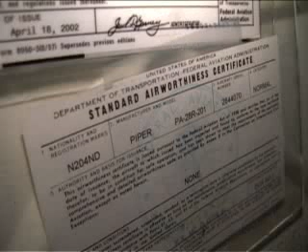Next, make sure that the documents required under 91.9 are located in the aircraft. The registration certificate and the airworthiness certificate are located behind the aft bulkhead. The airworthiness certificate must be apparent in the aircraft, so make sure you find the proper aircraft registration number. UND is now placing other required documents for flight inside these little bags.

I'd like to open up the bag and make sure that the registration number of the aircraft corresponds with the aircraft you're flying. Check the front page of the Pilot's Operating Handbook to make sure you see the proper registration number there. Also open the book to Section 6 and check that the weight and balance data corresponds with what you've computed using AIMS, if you use AIMS for your weight and balance information.

Also inside this bag is the minimum equipment list. As you open it up, make sure you find the letter of authorization right away inside. Also, in the back you'll find the supplements for the operation of the GPS units located inside this book as well.

The next item on the checklist is to check the Hobbs meter and tachometer. Get the dispatch book and check what you see on the tach and Hobbs versus what the dispatch book actually says. As I open the dispatch book, check the MEL placards or deferment placards in certain aircraft to make sure you see appropriate MEL'd items.

If you do have something MEL'd, grab the minimum equipment list binder and check that it was properly done. Next, we have the maintenance sheet, which tells us when inspections are due. Make sure you fall before the date listed as the do-not-overfly date, and check the tachometer versus what the maintenance Hobbs says.

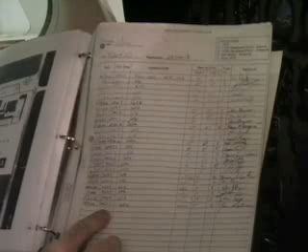Also in the discrepancy pages, make sure all open discrepancies have been closed out. Check the bottom to see that the corrective actions show the discrepancy has been closed out and signed by a maintenance official. Other commonly forgotten items in the dispatch book include checking that the FCC certificate is in place if you're going on an international flight - you'll find it in the very back. Also, if you're going on an IFR flight, remember the VOR must be inspected within the previous 30 days. Looks like this one was done on 10/12 and has just a little over a week left.

Next on the checklist is to release the control wheel and check that the flight controls are free and correct. As you move the control wheel to the left, make sure the left aileron moves up and the right aileron moves down. Check the opposite control: right aileron up, left aileron down. Pull the control wheel back, the stabilator goes up; push forward, the stabilator goes back down.

After that, we're going to check the static and pitot drains. Reach your hand down next to your seat, give them a push, and check for any water. These link right to the pitot-static mast. There are lines that feed up from the pitot-static mast towards the pitot-static instruments, and you can find if any moisture has gathered in this system through these vents.

Next thing is to cycle the fuel selector. We know that this engine ran on the right tank since it's on the right tank position. Move it to the left side, then move the position towards the off selection as well, then back over towards right again, just to make sure that it has full freedom of motion. So check that fuel selector.

Next thing we want to check is the alternate static source. On most Piper aircraft, it's located right underneath the panel on the pilot's side. If the alternate static source is parallel with the panel, it's in the normal position. You want to make sure that it's in that position. If it's armed, it will be perpendicular to the panel. So our alternate static source is in the normal position.

Next, we move up towards the magneto switch, make sure the key's removed and it's in the off position. After which, we'll move up towards the clock. Check that the second hand is sweeping and the local time is set. You can push in the small knob and twist it to change the time on the clock if necessary.

The next thing is to check the flight and nav instruments. Under 91.9, they list required markings and placards for flight. Markings include the numbers on the airspeed indicator, HSI, altimeter, and vertical speed indicator. If these things aren't visible, then this aircraft isn't legal to fly. Make sure you don't see any cracked glass. Check your attitude indicator, make sure it didn't tumble or flip over. Also check the condition of all the markings on these instruments.

The next item on our pre-flight inspection is to check the compass. You like to run your hand along the compass to make sure that there's no denatured kerosene leaking out. The reason they put that fluid in there is the fact that it won't freeze. Also check to make sure that the compass card is present. Again, this would be required as a marking under 91.9 on your aircraft.

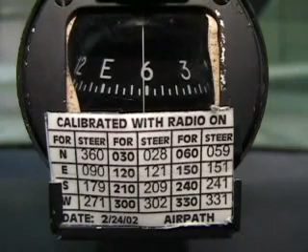Next, we have the emergency locator transmitter. We check over and make sure that the switch is in the armed position.

After the ELT, we'll move down to check that the heater and defroster are in the off position, and the circuit breakers are in. Notice on the Arrow there are only a couple of circuit breakers on most models that you can pop. The landing gear and the battery feeder breaker are the only two that can really be physically popped on most Piper Arrows. Afterwards, we check that our alternate air source is closed.

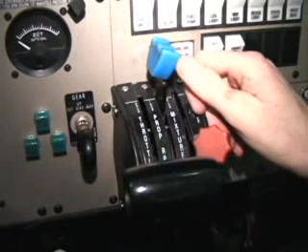The mixture is in the idle cutoff position, propeller controls full forward, and the throttle is closed. After which we want to cycle the flaps, making sure that the flaps will easily move through all of the positions. Afterwards, I like to leave the flaps in the fully extended position in order to continue with my exterior pre-flight.

We move down to the emergency gear extension lever, make sure it's in the up position. If it's in the down position, your gear will never be able to retract.

After checking the emergency gear lever, we move over to the fire extinguisher. We want to make sure that the extinguisher is properly secured, so check that it's latched. Also, when you're looking at the fire extinguisher, make sure that the pin is in place and you feel that there's some mass to it, so that it's not been discharged. These dual halon fire extinguishers, after being discharged, will discharge their entire charge in 8 to 10 seconds, it'll all be gone. So if you pop this thing, it will have nothing left. So you want to check that every once in a while.

After checking the fire extinguisher, we make sure that the gear handle is in the down position, and the day-night switch is set as required. Make sure you're in the day position for day flight, otherwise your annunciators won't show up properly.

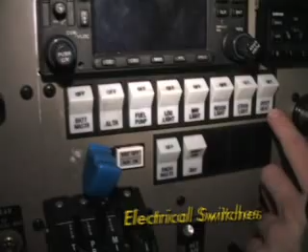Electrical switches, we make sure all are off. After the electrical switches, we flick on the battery master and check that we get 3 green lights that show up. If your nav lights are on, you'll notice that they'll be completely dim in the daytime.

Next thing we check is that the annunciator lights come illuminated. Vacuum, alternator, and oil annunciators should be located above.

After checking the annunciator lights, we make sure that we have the switch and panel lights positioned as appropriate. Since I'd be going on a day flight, I want to make sure that my switch and panel lights are off.

Check the fuel gauges to make sure that you have adequate fuel quantity. Remember that the Arrows at UND Aerospace aren't topped off between all flights. You'll find that they'll be filled to tabs, giving you 50 gallons, or 25 a side.

Check the engine instruments prior to your flight too. If you notice, all of our engine instruments have a little white dot next to them. The little white dot is where the needle should fall during the off position. With the battery master off, all of the instruments will fall towards that position. Make sure with the battery master on that all of the needles fall off of the small white dot.

Next, we want to turn on all of our aircraft lights and make a run around the aircraft to check that all lights properly illuminate.

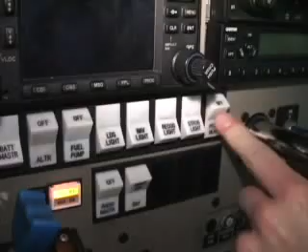Also, you want to turn on the pitot heat. The pitot heat can be on for a total of 3 minutes on the ground. You want to make sure that the pitot mast is properly heated prior to any flight. The stall warning vane is also checked at this time, and afterwards, we turn all of our electrical switches off.

To begin with the exterior pre-flight, we're looking over the windows and fuselage on the Piper Arrow. First thing you'd want to make sure is that all of our windows do not have any extremely large scratches, and that the aircraft looks like it wasn't hit by a fuel truck.

The next item on the checklist is to check the flap. We'll notice that the flap on the Piper Arrow only locks into position while fully up. It tells you not to use it as a step when down, because you'd obviously fall. We have the actuating arm in the lower left-hand corner, and we'd like to make sure that we check the actuator arm for freedom of motion.

Underneath the flap, you'll notice a bonding strap. The bonding strap is used to discharge static electricity to the frame of the aircraft, similar to the static wick. The flap also has one static wick.

The next item on the Piper Arrow pre-flight is to check the aileron. We want to check the aileron for freedom of motion. If you locate the hinge on the central portion of the aileron, you'll find an actuator arm similar to that on the flap. Check for freedom of motion.

Also, the aileron has two static wicks and will move in a fashion more up than it does down, due to the fact that these are equipped with differential throw ailerons.

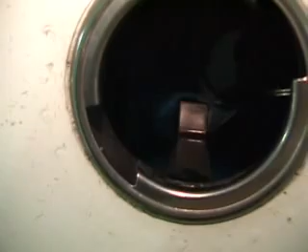The next item to check on our aircraft is the fuel cap and fuel quantity. First, we'll remove our fuel cap. You'll notice there's a black rubber gasket that should be located around this fuel cap. Also, Piper Arrows are filled only to tabs at UND Aerospace. This leaves 50 usable gallons of fuel in our aircraft.

After checking our fuel quantity, we're going to want to inspect our fuel for contaminations and to make sure we have the proper type of fuel. Simply insert the fuel sump into our fuel sump on our aircraft. Notice that the fuel is blue in color. Any water or contamination would float to the bottom of the cup. We'd notice that if there was 100 octane fuel mixed in with our blue 100 low lead, the fuel would turn clear in color. 100 is typically green, 80 octane fuel is red in color.

After inspecting the fuel, we want to check out the right main landing gear on our Piper Arrow. The first thing we notice is that our tire is properly inflated. I also like to give the tire a good roll to check and make sure that the tread underneath is not worn, as well as the tread on top that is exposed.

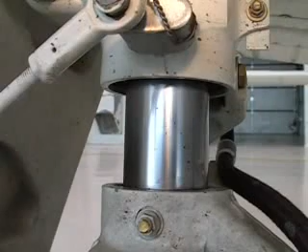Also, according to Section 8 of your airplane flight manual, 2 inches plus or minus 0.25 of required strut inflation is required on our main landing gear oleo strut. About 3 finger spaces will tell you that you have the 2 inches.

The next item that's visible is your brake caliper. You want to make sure that red fluid is not leaking out of our caliper, as well as that the 2 pucks inside of our caliper have ample meat still on our brake pads. This works similar to any brake pad system in your car. Mil-Spec 5606 is the red fluid used in this system.

The next item we'd like to check would be the gear door. Make sure the gear door is properly attached to the aircraft. It actuates automatically as the landing gear is retracted.

Next, we'll notice we have our down lock switch. You want to make sure that the down lock switch is making contact with the down lock hook, and is not bent in any fashion as well.

Another micro switch you can check for is your up limit switch. If you reach up into the wheel well, you'll find the up limit switch. You want to make sure this switch as well is not bent. This is what turns off the red gear warning unsafe light after the gear has been fully retracted.

Also, you'll notice we can see an actuating cylinder up inside of the wheel well as well. Again, you want to make sure there is no red hydraulic fluid, the Mil-Spec 5606, leaking from this system.

After inspecting the right main landing gear, we want to check that the fresh air inlet is free from any obstructions.

After inspecting the fresh air inlet, we want to check the windshield and outside air temperature probe. The windshield can easily get covered with bugs in the summertime. If you find that it's hard to see out of your windshield, give line service a call on 123.3 and they'll gladly come and clean it off.

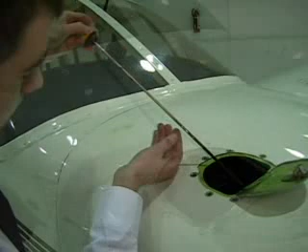If it's the winter, be sure to remove the engine cover before attempting to check the oil quantity. Remove the oil dipstick, and first, make sure and check that the black rubber gasket is in place on the top of the dipstick. This prevents moisture from entering the oil system and also prevents oil from leaking out during engine operation. We'll check our oil quantity to make sure that it falls between 6 and 8 quarts of oil.

The pilot's operating handbook refers to a minimum quantity of 2, but according to UND Aerospace, we cannot operate our aircraft with less than 6 quarts of oil. Looks like our airplane has about 8.

Next item on our checklist is to inspect the cowling latches after taking a look at the oil quantity. Make sure that our cowling latches are secured, and next we move down to check the oil cooler inlet.

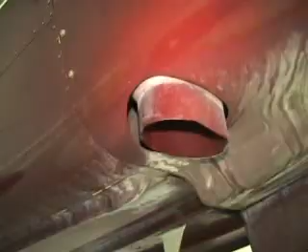This inlet right here is not the ram air intake similar to that on the Piper Warrior. It actually leads down to the oil cooler. Here's the exit point for the oil cooler. If you reach your hand inside, you can actually feel the small radiator-like device inside of the aircraft.

Up on top of the cowling as well is a strong point on the cowling to prevent any dents from occurring as the door swung open. You'll notice that the point can take a good deal of force.

After inspecting our oil cooler inlet and cowling latches, we want to take a look at our exhaust stack on the Arrow. Pretty much make sure that the exhaust stack is in place. If the aircraft's cool, you can give it a wiggle to make sure that it's not falling off, but be cautious of a hot aircraft. These can be quite hot.

After inspecting the exhaust, we want to make sure that our nose gear is safe as well. We're looking for 2.75 inches of inflation on our nose wheel oleo strut. Again, similar to the main landing gear, these are filled with nitrogen gas.

The service point is located inside of the cowling. Also, there would be a red mil-spec 5606 fluid that could be spilling out of this oleo strut as well. If it were damaged, you'd notice there'd be metal on metal contact and possibly a puddle of red fluid on the ground.

Notice on the left-hand side of this nose wheel, we do have a shimmy dampener. The purpose of this fluid-filled shimmy dampener is to dampen any shimmying motion as you get to high speeds with the nose wheel running down the runway. Due to the fact that it is a steerable nose wheel, it's not in a fixed position. Therefore, this device is necessary.

Just check that it is attached firmly to the aircraft as well. Also, we have an extension assist spring that must be intact as well on the nose wheel.

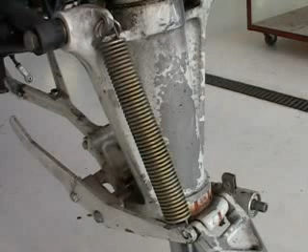We can check our nose landing gear doors that they're attached properly and move towards the back where our micro switches are located. Up underneath, you'll notice the up limit switch and down lock switch.

You'd like to make sure that the down lock switch is making contact with the down lock hook and therefore properly working. Similar to those on the main landing gear, you do want to make sure that none of these switches are bent. Also, we would like to check the actuating cylinder for any leaking of hydraulic fluid.

After inspecting the Piper Arrow nose wheel, we want to inspect the landing light on our aircraft. Notice there is a bezel located around this landing light that should be properly in place. Typically, this is a common error on this aircraft. You do want to make sure that this is fastened.

Afterwards, we'd like to check the air intakes on this aircraft. The intake right below the landing light is for the environmental system. It supplies air that flows around a shroud around the exhaust to bring heated air into the cabin, also for the window defrost.

After inspecting the air intakes on the aircraft, we should inspect the alternator belt. The alternator belt is this black belt that has a pulley located around the crankshaft. Check for tension on the alternator belt.

Next item to be inspected is the aircraft propeller. The main point of the propeller where most damage will occur is the face of the propeller. The face refers to the portion of the propeller that actually faces the pilot that you could see while you're flying the aircraft. You want to run your hand up and down the propeller, checking for any dings or nicks that would occur due to normal damage in flight.

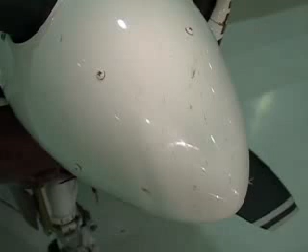A next item to inspect on the aircraft would be the spinner of the propeller. The spinner can easily be damaged by rocks during a run-up or while conducting soft field operations. Run your hand across the spinner and make sure that all screws are properly fastened.

The purpose of the spinner is to provide cooling air into the cowling. Notice the aerodynamic shape leads airflow right into the cowling and also reduces drag. Inside this propeller dome is a large actuating piston which causes the blades to change their pitch.

When inspecting the air intakes, you'll notice a small hole located near cylinder number 2 on the left-hand side of the cowling. This small hole allows cooling air to enter towards the lower portions of cylinders 2 and 4. There isn't a similar hole on the side with cylinders 1 and 3 because baffling, or rubber strips, leads air down towards the lower portion of the cowling to cool those cylinders instead.

On the sides of cylinders 2 and 4, internally, is the main air intake, located on the rear of cylinder number 4. This is the reason there really isn't a problem with induction icing on the Piper Arrow, and an alternate air source is only needed if the air filter gets clogged with debris.

Moving on from inspecting the front portion of the aircraft, remember to check that on the left-hand side of your cowling, the cowling latches are secured.

Afterwards, you'll roll underneath the cowling and inspect the oil breather, which has an orange cover and is a metal tube. Its purpose is to release water vapor from the oil. If the oil breather is clogged with ice or debris, once the oil reaches 180 degrees Fahrenheit, noted on the oil temperature gauge by a white line, the oil will release all water vapor due to its hygroscopic nature.

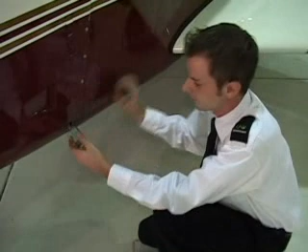There is another fuel strainer located on the left-hand side of this cowling. Similar to checking the one under the main fuel tanks, you remove fuel and check for any sediment or debris, as well as water, checking for the proper color as before.

After pre-flighting the rest of the cowling, the rest of the pre-flight on the left wing is similar to that of the right wing, except for two additional items to inspect.

You'll notice we have the stall warning vane located on the left-hand side of the wing as well. You want to check for freedom of motion of this stall warning vane. As the stagnation point shifts rearward on the wing while approaching the critical angle of attack, airflow will reverse and push up on the tab to initiate the stall warning.

When inspecting the pitot mast, check that the front ram air inlet is free of any debris or bugs. There's a drain hole on the bottom portion of the pitot tube. On any Piper schematic, you'll notice this drain hole is actually only attached to the static port side of the pitot mast. The true drain for the pitot tube is located inside the cockpit, at the pitot static drains on the lower left-hand portion.

After inspecting the left wing, we want to check our lower surface antenna. One thing you're checking for is to make sure they don't have a thick coating of oil on them, since you can have erratic signals if the antennas are covered with oil.

With our two types of aircraft here, certain ones have Bendix GPS and certain have Garmin GPS, so there are two acronyms to remember. This aircraft, 384, is equipped with Garmin GPS, so we're looking for TCAM: Transponder in front, GPS, communications, ADF, and marker beacon antenna. On Bendix equipped aircraft, we'd have TDAM: transponder, DME, automatic direction finder, then marker beacon.

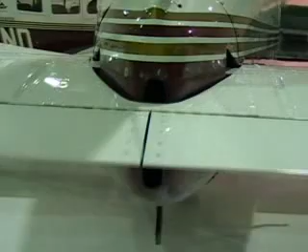While checking the stabilator, the anti-servo tab should also be checked as well. Check that the tab moves in the same direction as the stabilator with greater travel. The purpose of the anti-servo tab is to prevent over-controlling the aircraft and to give positive control feel.

Afterwards, you'd like to check that the tail tie-down has been removed as well. This tail tie-down has a threefold purpose. One of the purposes obviously is to tie down the aircraft.

Another is as a skid if you come in too tail low on a landing. The third is, while in maintenance, the aircraft will have a weight placed on the tail tie-down to stop it from tilting nose forward while on jacks.

The next item to inspect on our aircraft is the rudder. You want to make sure that the rudder has a slight freedom of motion, yet still feels attached. There is one static wick located on our rudder.

Up in the upper portion of the rudder of the aircraft, there is a counterweight as well. You can notice if you take your checklist and tap upwards, you'll hear it become hard surface towards the tip of the rudder located towards the front of the fuselage. This counterweight stops flutter, similar to those located on the ailerons.

After inspecting our rudder, we're to inspect the right side of the stabilator. The inspection process is exactly the same as that which we used on the left-hand side.

After inspecting the right side of the stabilator, you want to check the ELT antenna. The ELT antenna is this black antenna located on the upper portion of the right-hand side of the fuselage. Make sure it's securely fastened.

Also, the ELT battery is located behind this small ELT door. They use plastic fasteners on this for ease of removal in case you do need to arm the ELT manually if the switch up in the cockpit is not working.

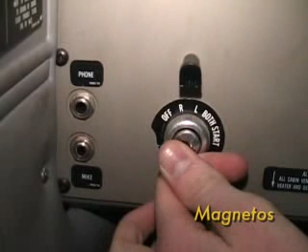The first item on the post-flight inspection is to verify that the magnetos are off. Be sure to turn the key to the off position and remove it. You want to make sure that the magnetos are properly grounded in order to protect anyone who moves the propeller accidentally on the ground.

The next item on the Arrow post-flight inspection is to make sure that the flight controls are properly secured. Take the seatbelt and place it around the control column and attach it. This will prevent the flight controls from flapping around in the wind.

The next item on our checklist is to check for oil leaks on the exterior of the aircraft. You want to take a look underneath the engine and make sure you don't see any puddling of oil.

The next item on our post-flight checklist is to check the aircraft exterior. You want to check the exterior of the aircraft, making sure that there's no dents or dings in the aircraft after your flight.

The next item on the Piper Arrow post-flight inspection is to check the tires and struts for proper inflation, and also to check the tires to see if there's excessive wear. You'll know if a strut's popped because there'll be red fluid leaking from the strut, that MIL H5606 that we talked about in the gear system, and also the strut will be bottomed out. There'd be no metal showing.

If you want to check the tire properly, give it a roll, and you can see if there's any flat spots underneath the aircraft. Also check for excessive wear. Maintenance won't replace a tire until cord actually shows through. It'll look like cloth coming through the tire, but excessive flat spots should be written up on the discrepancy page.

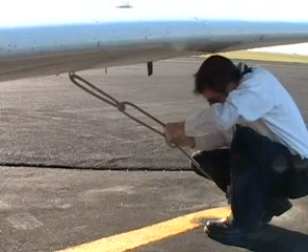The final item on the post-flight checklist is to chock the aircraft. After a flight, you should put the red chock in the front, symbolizing that the aircraft needs fuel. Policies and procedures also say if the wind velocity is over 29 knots at the airport at the time of your post-flight, you should tie down the aircraft as well.

The Piper Arrow has Airmotive RSA type fuel injection for its fuel delivery system. The Arrow has two wing fuel tanks with a total capacity of 77 gallons with a usable capacity of 72 gallons. UND Aerospace fuels the Piper Arrow to tabs, which gives 50 usable gallons of fuel.

On each fuel tank there is a fuel vent. The vent has a twofold purpose. First of all, it allows air to enter the tank to replace fuel as it is consumed. If the vent were clogged, there eventually would be fuel starvation failure of the engine. This will be caused by the vacuum created within the tank and the engine-driven and electric boost pumps' inability to overcome the force of the vacuum created.

The secondary purpose of the fuel vent is to vent excessive fuel out of the tank. If the aircraft is topped off on a hot day, the cold fuel in the tank will expand and then be forced out of the vents. The caps on the tanks have a gasket which must be checked during pre-flight to prevent water from entering the system. The fuel cap is also vented. A small vent will allow for air to flow into the tank if the fuel vents become clogged.

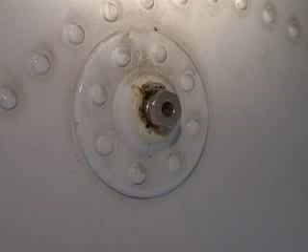Each tank has a fuel drain on the lowest point of the fuel system. The fuel used at UND Aerospace is 100 low lead. The Piper Arrow is capable of using both 100 low lead and 100. 100 low lead is blue in color, while 100 is green in color.

If 100 low lead and 100 octane fuel were to be mixed, the combination of the two would cause fuel to be clear. Jet fuel is also clear. Be sure that it is 100 low lead or 100 used in your tank. Smell the fuel. 100 low lead has a distinctive smell, as does kerosene. Kerosene smells much like diesel fuel. Jet fuel is also extremely oily when you rub it between your fingers.

The number referred to with 100 low lead is octane. Octane is a chemical property of fuel. The higher the number, the higher the octane content of the fuel. Also, the higher the number, the slower the burn rate. 100 low lead is used in our aircraft to slow the burn rate in our engines. If a lower octane fuel were used, we would have a chance of detonation.

If you think back to your car, you use 87 to 92 octane in your vehicle. Higher octane fuels are required for cars with higher compression ratios or some sort of forced induction, such as a turbocharger. Most production vehicles on the market now have compression ratios around 9 to 1.

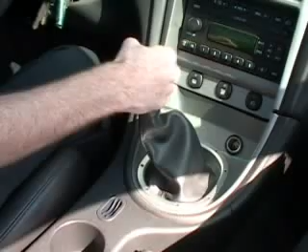Meaning they squeeze 9 parts of air into a space made to fit 1. Any car with a higher compression ratio will require the use of a higher octane fuel. The Piper Arrow has a compression ratio of 8.5 to 1. The reason we use such high octane is the poor mixing of fuel and air, leading to uneven burning of fuel in the Arrow.

After the fuel is fed from the tank, it travels to the 3-position fuel selector. The fuel selector must be fully in the left or right position, otherwise fuel will not flow.

Fuel flows from the fuel selector then into the filter and/or gascolator, and the fuel filter will remove large debris from this to stop it from flowing through the injectors, which can easily be clogged. Also, you'll notice there is a fuel strainer right here where we can take a sample of the avgas to make sure that it is clear of debris.

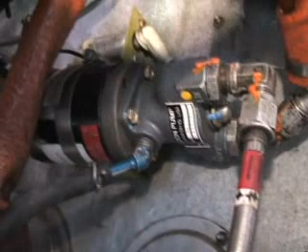After the fuel is filtered, it flows to the electric boost pump. The electric boost pump is a vane-type pump which provides fuel pressure for priming, or also to provide operating pressure in case of the failure of the engine-driven fuel pump. There's a small black rubber hose that comes off of the electric fuel pump to vent away excessive fuel pressure overboard. It can be found in the rear of the cowling near the oil breather.

Afterwards, fuel moves to the engine-driven fuel pump. The engine-driven fuel pump is a diaphragm-type fuel pump. It takes the rotary motion of the moving gear off the accessory case of the engine and changes it into linear motion through the use of a cam. The cam lobe moves the diaphragm up and down, moving fuel through the system.

Fuel flows from the engine-driven fuel pump to the servo regulator. The servo regulator is the device which meters the amount of fuel which flows to the fuel injectors. The first point of control inside the servo regulator is the fuel control unit, which is attached to the mixture control. This is a variable size orifice which controls the amount of fuel which makes its way from the pumps towards the engine.

So here's our mixture control valve. This is where your red-handled mixture knob is actually attached. Notice that up here we do attach to a variable size orifice. As we pull back on this, it will limit the amount of fuel that will be allowed to pass through the system, similar to the mixture control that you had in the carburetor in the Piper Warrior. Right here is your inlet fuel pressure that will be fed into the system, and it will soon be fed towards the servo regulator where it's further metered.

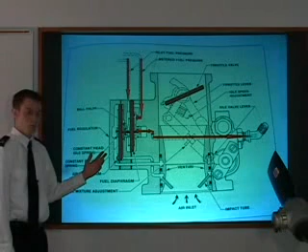Here's our diagram of the servo regulator. As we said before, there are 2 diaphragms in here which control fuel output, and we'll see shortly how these work. Right here would be our air diaphragm. Here's our fuel diaphragm, both attached to a ball valve assembly, and we'll see how this moves in a second. We have here metered fuel pressure, and here is unmetered inlet fuel pressure. This will be a constant that won't change. Your throttle valve is right here, so as you move your black throttle inside of the aircraft, you'll be moving this butterfly valve to an open position. And here would be our outlet fuel pressure, which will flow to the flow divider.

On the left-hand side of the engine of the Piper Arrow is located the throttle linkage on the servo regulator. This is directly attached to the butterfly valve, which controls the amount of air flowing in through the air filter and thus in through the induction manifolds into the engine. As we move the throttle forward, we open the butterfly valve, and you'll notice the linkage moves. Moving the throttle back will close the butterfly valve, thus reducing the amount of air that flows through this system.

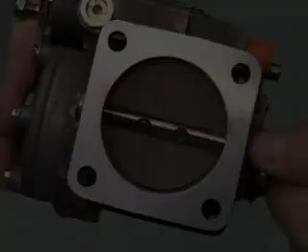So let's go ahead and animate this a little bit and see how this would work. First off, we notice that we're moving our throttle right here. Secondly, we have impact air pressure. As that throttle is moved open, there'll be a higher air pressure flowing through this servo regulator assembly. So as this increase in air pressure flows through an impact tube that's located inside of the throat of the servo regulator, we'll have high pressure air flowing upwards towards the air diaphragm.

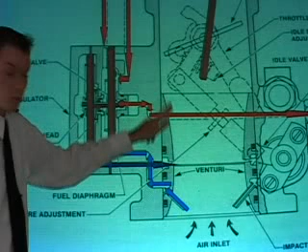The next step in this sequence is caused by this venturi shape right here. The venturi allows for a suction to be created, and that suction will draw off the backside of this air diaphragm and cause a motion outward.

Notice now, metered fuel pressure will have to increase as the throttle is moved forward, and therefore we'll have a forward pressing motion against the fuel diaphragm as well, but inlet fuel pressure did not change. That's a constant coming off of our engine-driven fuel pump. After we have both of these values pushing against this assembly, the entire assembly will now move. Our ball valve has come off of its seat, and therefore the metered fuel pressure is able to increase, which is being fed to the engine. You can see our little arrows get bigger, showing that more fuel would now be flowing to the flow divider.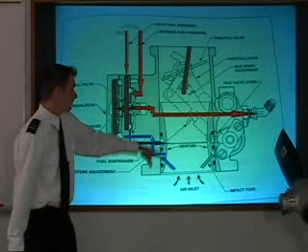So the simple principle behind this is just using air as one source of metering pressure and fuel as another. As the throttles move forward, an increase in metered fuel pressure, along with an increase of impact air and a suction created at this diaphragm, or the venturi inside of the servo regulator, will cause this entire assembly to move outward, ball valve off of its seat, increase in fuel pressure going to the flow divider.

Okay, the idle control on this aircraft is done through the use of two adjustment screws. We have to take into account the speed that we want the aircraft to idle at, and the idle mixture control that we'd have occurring as well.

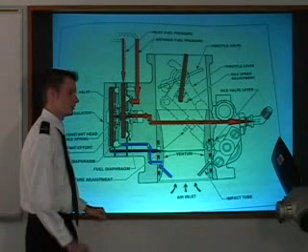Idle mixture is determined by an offset of the ball valve on this side of the servo regulator. Maintenance will adjust a screw to try to get the aircraft towards a 14.75 to 1 stoichiometric ratio of air to fuel by offsetting this ball valve at a certain rate. The offset that occurs for the speed of the engine will be up on the throttle valve. So by turning a screw, they'll be able to offset how much this butterfly valve will be open. The assembly for the air diaphragm and fuel diaphragm is really similar to the idle speed circuit on the carburetor - the Piper Warrior doesn't really come into play until higher speeds when you actually begin to move the throttle beyond the idle speed setting. Therefore, we do need this adjustment that occurs at the ball valve and the throttle valve.

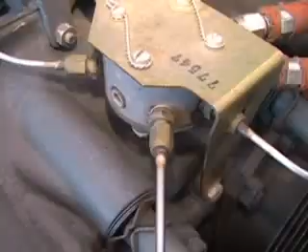On the upper portion of our engine in the Piper Arrow, you'll notice the flow divider. It's the spidery looking device which distributes fuel evenly to all 4 fuel injectors. We have one line here which is a supply line off of the servo regulator. After fuel is metered by the servo regulator, it's fed to the flow divider and then down to each of the 4 injectors. A 5th line that comes off of the flow divider feeds fuel to the fuel flow gauge. This gives us our rate in gallons per hour of fuel flow right near the manifold air pressure gauge. Notice each of these 1/8 inch stainless steel lines feeds down and into one of our fuel injectors.

There is a poppet valve inside of the flow divider which allows fuel flow through the system at low power settings. The purpose of this valve is to stop air from entering the system at low throttle settings. It keeps back pressure in the fuel system. As the engine shuts down, the poppet valve closes, keeping fuel in the line from the servo regulator to the flow divider. This stops a condition called vapor lock.

Vapor lock occurs when air is trapped in the line between the flow divider and the servo regulator. Another condition which causes this is excessive heat. This is what makes the Arrow difficult to start on hot days after it's been run. After the engine is shut down, there is excessive heat in the cowling, and the fuel in the line from the servo regulator to the flow divider begins to vaporize.

So after fuel flows through the flow divider, it's then driven to our fuel injector. The fuel injector allows for a nice fine misting of fuel rather than a drip of fuel that would flow out of this injector. These are called CIS, or continuous injection systems, because unlike your car, the fuel flow doesn't ever actually stop - it continuously injects fuel into this engine.

On the downward stroke of the cylinder, as that piston is actually moving downward, fuel will be pulled in at a stronger rate from the injector with the intake valve open. So when your intake stroke is occurring is when truly this injector will be having its pulse, or fuel flowing from the injector.

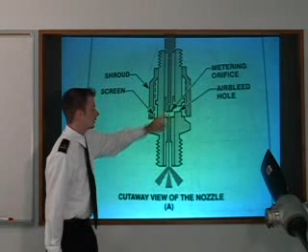The way that we prevent fuel from coming out in random drips and instead cause a nice fine spray pattern is through this air bleed hole right here. The true name for this is an emulsion chamber. Emulsification is a process by which liquid is made into more of a vaporous mixture, and that's what occurs here.

There's also a little screen over this emulsion chamber which stops dust and dirt from making its way into the injector and therefore being sprayed.

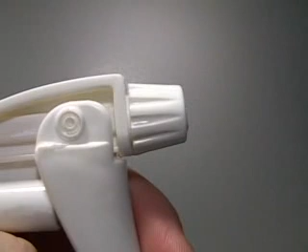Think of this like a Windex bottle. The bottle has two settings, spray and stream. When the bottle is in the stream position, no air is mixed into the cleaner before it is sprayed. In the spray position, there's a slight amount of air mixed into the cleaner before it's sprayed, allowing it to be atomized. This is the same reaction as the emulsion chamber in the fuel injectors.

The Piper Arrow landing gear system is electrically driven, hydraulically actuated, and fully reversible. The system is filled with hydraulic fluid made of MIL-H-5606, which is red in color.

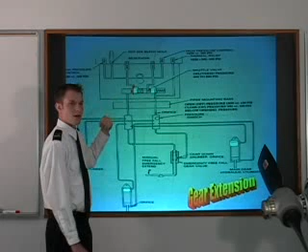Hydraulic fluid through this pump will not flow through the gears, it flows around the gears to cause the moving force of the hydraulic fluid through this system.

The components of the Piper Arrow gear system, the pump and gear up and down solenoids, are located aft, behind the rear bulkhead with the baggage compartment door removed. You'll notice here is the gear reservoir and pump motor.

There's a little placard that tells you to back off the dipstick 1.5 turns. This allows for proper venting of gases that build up as the fluid is heated through motion.

Also, you'll notice here are your gear up and down solenoids, which you can find on the electrical gear schematic as well. We notice that we have two entry and exit points of hydraulic fluid from the reservoir up on the upper portion of this diagram.

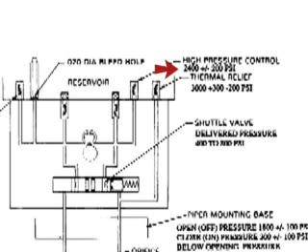Right here we have a high pressure relief. On the upside, when we're retracting the landing gear, let's say the pump continues to turn and high pressure is building. As you can see, we have 2,400 plus or minus 200 psi, which will allow a relief of that fluid to flow back into the hydraulic reservoir, thus stopping damage from occurring to the system as we're retracting the landing gear and the pump not properly turning off.

As a backup, we have a thermal relief which operates in the same fashion. If excessive pressure builds up, remember anything under pressure will have an increase in temperature. At 3,000 psi plus 300 minus 200 psi, our thermal relief will blow and allow fluid to flow into the reservoir, thus stopping damage if we have a failure of the high pressure relief.

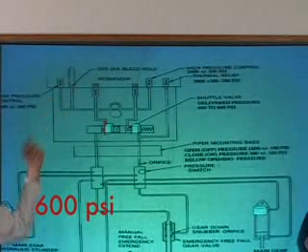Over on the low side, we notice we have a low pressure bleed. It lists a 600 psi point at which this will actuate, stopping the flow of fluid on the low pressure side of the actuating cylinders. So this will stop damage from occurring as the gear are extended outwards.

Right here we see the 020 diameter bleed hole. This is the point where, when maintenance is servicing this hydraulic system, similar to bleeding brakes on your car, they'll remove fluid from the system until air bubbles no longer show. So this would be the point at which maintenance will bleed the system of the MIL-H 5606 red hydraulic fluid located inside the system.

Right here we have the shuttle valve. The shuttle valve directs fluid that's returning from the low pressure side, or the extension side, of our landing gear. On this side we have the gear up check valve.

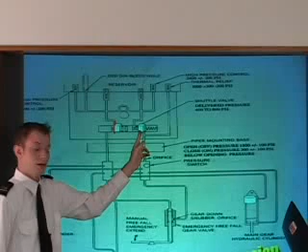This diagram notes them kind of in unison with each other, but they do move independently. So the gear up check valve controls the flow of fluid on the high pressure or retraction side. The two devices we see right here are fluid distributing manifolds, located under the rear seats of the aircraft, and they direct the flow of fluid towards the actuating cylinders. So it's not exactly as complicated as this diagram looks when you see it in the aircraft.

We're now looking under the rear seat of the Piper Arrow. We have the floorboard ripped up here so you can follow the hydraulic fluid lines for our landing gear system. Right here we have the up and down lines routing hydraulic pressure to or from the hydraulic reservoir located aft, behind the rear bulkhead of our aircraft.

Here's one of the lines that feeds fluid up towards the nose wheel. You'll notice that these two hydraulic lines feed pressure to the up or down side of the nose wheel actuating cylinder. Here are two lines which feed to the right main landing gear.

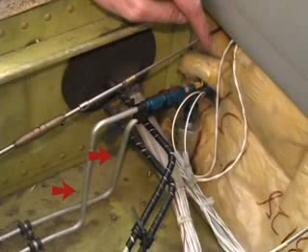Beneath these lines is the pressure switch. This is the switch that, upon reaching 1800 psi, will shut off the hydraulic pump.

We notice now that we do have our actuating cylinders for both the main landing gear and the nose gear. We have the down side where fluid would be forced in to cause the gear to extend, which is on the upper portion in our diagram here, and the retraction side of our cylinder. Hydraulic fluid would come into the base of the cylinder and cause these actuating cylinders to move upwards, thus bringing our gear into the aircraft.

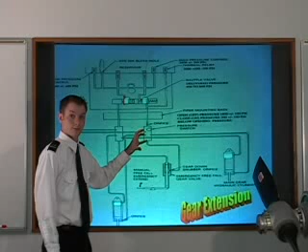Right here we have our emergency extension valve. As this extension valve is moved forward, the pressure would be released. This is a gravity free fall system. It will allow the pressure that's on the retraction side of the cylinders to flow through these distribution manifolds back to the extension side, thus causing our gear to extend manually.

Here we have a Piper Arrow main landing gear assembly. You'll notice with the Piper Arrow on jack stands, the oleo strut has much greater inflation than the normal two inches required on the pre-flight inspection.

We'll move upwards, identifying the components on our gear schematic here. Notice that we have the main landing gear door attached directly to the gear trunnion assembly. As the gear rotates inward, the gear doors will follow.

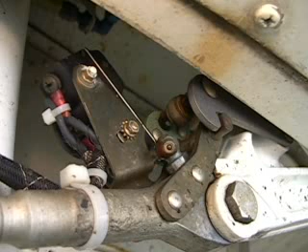Next we have the gear down lock hook located right here. The gear down lock hook stops the gear from folding back inwards. There's also, on the reverse side, a trailing link as well, which will stop the gear from folding outwards. Behind is the down lock switch, which, with down lock hooks engaged, will have contact, and therefore the switch will be closed, allowing the green light to be illuminated for its respective landing gear.

One different component on the left main landing gear of our Piper Arrow is the squat switch. With this gear on jacks, we can see that the squat switch is actually making contact right now. Therefore, power would be allowed to flow through this system with the oleo strut fully extended, allowing the gear to be able to be retracted.

This is a safety precaution with the aircraft on the ground. The squat switch will be open and the gear will not be allowed to be actuated. No current can flow through the system.

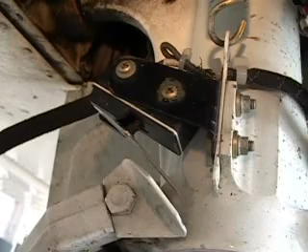So as our gear pump begins to turn, we'll notice that fluid flows down against the shuttle valve. The shuttle valve is able to move out of the way and cause the fluid to flow to the distribution manifold. As fluid flows through the distribution manifold, this would actually be occurring in all the landing gear at the same time, but for the purpose of demonstration, we'll show it occurring on one cylinder at a time.

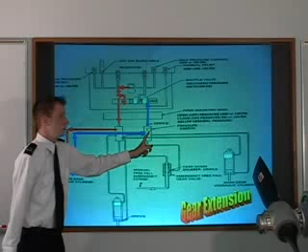We'll notice fluid flows down and to the extension side of the actuating cylinder. We're looking at the left main right here. We're causing this actuating cylinder to move downward, fluid to fill in the reservoir here. Fluid then that was on the upside of this cylinder will be able to move through its respective distribution manifold up towards the gear up check valve. The gear up check valve will be displaced out of the way, and fluid will be allowed to return back towards the pump and also the reservoir.

Now we'll notice it'll occur on the rest of the landing gear. Just as we said before, it will occur at the same time. So we notice our actuating cylinders are moving, fluid is returning back towards the pump as well as the reservoir.

We can extend the landing gear in the Arrow as fast as 129 knots because we have this delivered 600 to 800 psi that's going against this system to allow those down lock hooks to click over and engage. And what occurs to shut this pump off is the down lock switches will be activated, thus shutting off the pump in this system.

As power is fed to the downside of our pump, the gear will begin to move downward as the handle is put into position. Notice the main landing gear are the first to extend and the nose wheel is slowly lowered. This is to prevent damage from the reduced weight on this landing gear. We don't want it to slam in place and fly past that down lock hook.

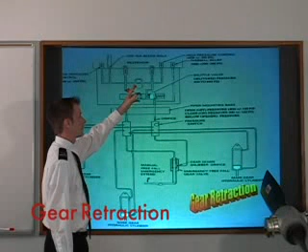As our landing gear is being retracted, we move our gear handle towards the up position inside of our aircraft. The pump begins to turn and fluid will be allowed to flow around the pump motor towards the gear up check valve. The gear up check valve is moved out of the way and fluid will then be allowed to flow towards the distribution manifold on the upside. Now we have fluid towards the base of the actuating cylinder, which will allow it to move upward.

Fluid will fill into the small reservoir, and fluid then from the downside will be forced back towards the distribution manifold and then up towards the shuttle valve. The shuttle valve will be displaced, and fluid will then be allowed to flow back towards the pump as well as the reservoir. Now we can see that fluid would be moving through the system and causing all of the actuating cylinders to move.

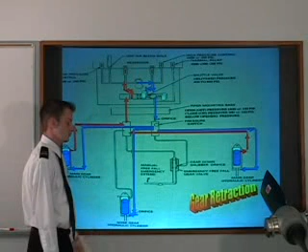One noteworthy item though is as the nose wheel is being retracted, the orifice located on the upside distribution manifold for the hydraulic fluid will be used. Remember, the nose wheel retracts quickly due to the aerodynamical forces acting against it, as well as the fact that it is lighter than both main landing gear. Therefore, it will be the first to retract.

As it comes up into the wheel well, it'll cause the hydraulic fluid that was being sent towards that actuating cylinder to reverse flow. And as it reverses flow, it will head back towards the hydraulic pump. Remember, this is like comparing operating a small electric toy car by hand and moving the motor too quickly - you could cause damage to the pump. Therefore, this orifice is necessary, and so is following the retraction speed maximum of 107 knots.

As Jeff moves the gear handle to the up position, power will now be able to flow to the pump motor. Notice the main landing gear retracting first, and the nose wheel actually made it up initially. The nose wheel was the first to retract due to its reduced weight.

You'll notice that as the gear made their way up, the main landing gear hesitated for a second. This is due to a resurgence in hydraulic fluid, which flows aft from the nose wheel landing gear actuating cylinder back in through the distribution manifold on the upside of this system. That hydraulic fluid causes the main landing gear to hesitate for a second before they're fully retracted.

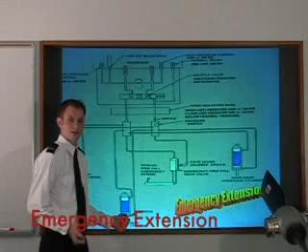So the emergency gear extension on the Piper Arrow is done through a manual extension using hydraulic fluid, displacing it back towards our downside of our cylinders. Remember, the only force that holds the landing gear up is hydraulic pressure. 1,800 pounds per square inch of hydraulic pressure will be sent on towards the upside of these actuating cylinders. After that pressure switch is shut off, the pump will no longer run unless an emergency situation does occur.

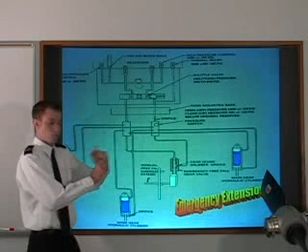If for some reason we go through our checklist and cannot get the landing gear to extend through normal means, all we have to do is displace our emergency gear extension valve. What this will cause to happen is the emergency valve will open up. It actually twists and causes a variable size orifice to open up completely, and then fluid will be allowed to flow down from the actuating cylinders.

Notice all of the actuating cylinders have now moved downward. The fluid will flow towards the distribution manifold and then over towards the other, on the downside distribution manifold. Fluid will be directed towards the downside, causing the actuating cylinders to be displaced and lock in place properly.

This is why we have to slow to 87 knots. As we said before, we can extend the landing gear as fast as 129 knots due to the fact that we have hydraulic pressure to help assist bringing those down lock hooks over and in place. If you're going much faster than 87 knots, the aerodynamical forces acting on those landing gear, particularly the nose, will cause them to just flop and free fall and never lock into place unless action is taken by the pilot.

One thing you can do is actually get on the rudders to cause the mains to swing outward and use the stabilator to cause the nose to swing outward and lock in place, if you mistakenly try to extend the landing gear at a speed greater than 87 knots.

One noteworthy item on this schematic is the gear down snubber orifice. This is another restricting orifice which slows the flow of fluid back toward the downside of these actuating cylinders. If you have excessive fluid flowing too rapidly toward the distribution manifold, the gear will plop down quickly and could possibly cause damage to the downlock hooks, so they won't properly lock in place.

When you look at an aircraft on jacks with the emergency gear extension valve being actuated forward, the gear hesitate for a second before they lock into place. This is the action of the gear down snubber orifice, and it's a limitation which helps protect the aircraft from damage. Now we'll take a look at the emergency landing gear extension sequence on our Piper Arrow.

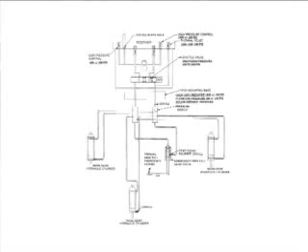As the emergency landing gear extension valve is moved forward, you'll notice the gear do not slam down violently. Notice the nose wheel slowly extended - the extension assist spring helped bring it into position. The gear down snubber orifice on the hydraulic diagram assists in stopping the gear from slamming down too hard and overcoming the downlock hooks. We must slow the aircraft to 87 knots to allow gravity to cause the landing gear to drop and lock in place.

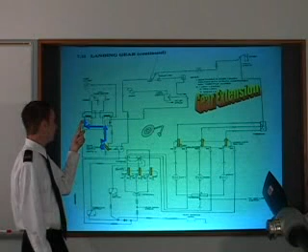Remember, a solenoid is just a larger switch that is moved by the movement of a smaller switch, similar to the battery master in the Piper Arrow - as you turn on the battery master, you'll notice a click sound coming from the rear of the aircraft. That clicking is the solenoid making contact and allowing power to flow from the battery to the main bus of our aircraft.

So as we move our switch down, the solenoid makes contact and power will flow up to the downside of our gear pump. Power will begin to flow to this pump and the pump motor will actually begin to turn, so now hydraulic fluid will begin to flow through our system. As the gear begin to move downward, the up limit switches will no longer be contacted.

Now the gear have begun to move toward the down position, so our gear warning unsafe light will illuminate. This occurs when the gear is in transit, and it will be shut off after the gear are in the down and locked position. During our 7-second extension sequence, we'll notice that the gear warning unsafe light is illuminated.

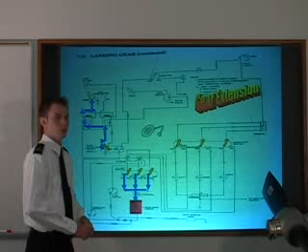The next thing that occurs is our down lock switches begin to become satisfied as our landing gear becomes fully extended, so we'll notice our down lock switches have moved. We now have power flowing from that circuit breaker - notice the indicator circuit breaker, power flows down and toward all of the down lock switches. After the switches are satisfied, the 3 green lights will illuminate.

After the 3 green lights are illuminated, we know our gear are down and locked, and we'll lose power to the gear warning unsafe light. The light will turn off, and power will continue to flow up toward this solenoid - again, a big switch being moved - so power will stop flowing through this system, the pump motor will turn off, and our gear are fully extended.

Remember that the Arrow gear system does have a gear warning unsafe horn. There are 3 situations which will cause the horn to sound. First, if the squat switch is open with the aircraft on the ground, the horn will sound and the gear warning unsafe annunciator will illuminate when the gear selector is placed in the up position. Also, the gear horn will sound with the gear in the up position and the throttle moved below 14 inches of manifold pressure.

Finally, the horn will sound and the annunciator will illuminate when the flaps are extended beyond the 10-degree setting with the gear up. The micro switch for the flaps is activated when the flaps are extended beyond 10 degrees.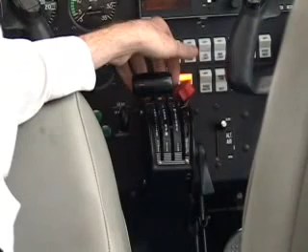That actuation of the micro switch will allow that 90 Hertz oscillating tone to occur, which alerts us to lower the landing gear. The aircraft pretty much thinks you're trying to land and wants to alert you to bring the landing gear down. You'll also notice the gear warning unsafe light will illuminate.

Another function that causes this annunciation to occur is moving the flaps beyond the 10-degree position. You'll hear a small click occur as the flaps move throughout a 15-degree arc and lock into the 25-degree position. There's the click, click off, click, here's the horn.

On this schematic, we notice we have the Piper Arrow towards the gear down position, and this would be on ground ready for takeoff, which is where we're sitting with the schematic. We have power flowing through the gear indicator side, showing that we have our 3 green lights illuminated, also stopping power from flowing down towards where our gear warning unsafe light would appear, and also stopping power from flowing towards the downside of the pump motor.

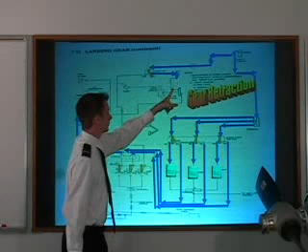So as we take off our aircraft, remember the first thing that will occur is our squat switch will move from the ground to flight position. The squat switch on this plane is located on the left main landing gear. As the oleo strut is fully extended, it'll make contact with the squat switch, thus allowing electrical power to begin to flow through the system.

Now we get our positive rate of climb out of usable runway, and we begin to retract our landing gear. So we'll grab our handle and pull it upwards, and notice we're again moving the switches towards the up position, and power will then be allowed to flow towards the solenoid. Again, a small switch moving a bigger switch, so the solenoid will be electromagnetically driven downward, and power will begin to flow towards the upside of the motor.

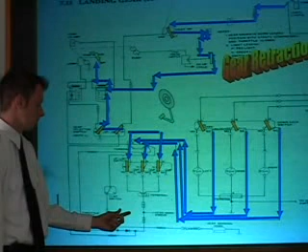We now have power going through the system, and hydraulic fluid is beginning to flow. So as the gear are retracted, the first thing we'll notice is the down lock switches will no longer be satisfied. Therefore, our 3 green lights will turn off, so we've lost power flowing through these 3 greens. Now, our up limit switches are not yet satisfied, therefore we're going to see the gear warning unsafe light appear in this system. Gear warning unsafe light is illuminated.

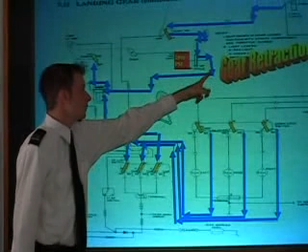As we further continue our retraction, the up limit switches will make contact. Remember, the up limit switches are not what turn the pump off. The up limit switches simply turn off the gear warning unsafe indication that we see in our aircraft. As we continue, the pressure will now begin to build in this system, and we're moving towards 1800 psi. As we achieve 1800 psi, the pressure switch will be fully contacted, and power will stop flowing through the system, and therefore we will no longer have power coming towards the upside of our gear actuating cylinder, and then the pump motor will stop running.

The Piper Arrow has either a McCauley or Hartzell constant speed propeller. A constant speed propeller is an extremely efficient propeller design due to the fact that it can change pitch to lead to efficiency throughout all flight regimes.

Fixed pitch propellers are designed as either cruise or climb propellers. Climb propellers are designed to turn high RPMs by a low fixed pitch. Cruise propellers are designed to turn lower RPMs through a high pitch design.

Think of this like an oar through the water. When the oar is at a fine pitch, it will slice through the water and not pull a boat forward. If the oar is at a slightly feathered pitch, it can more effectively pull the boat through the water. This is similar to a propeller moving through the air, taking a bigger bite out of the air, thus pulling the airplane faster, causing it to cruise faster.

The Arrow propeller is able to change pitch to be efficient through both climb and cruise flight regimes. The way this mechanism works is through the use of increased oil pressure being sent to the hub of the propeller, actuating a piston which changes the pitch.

During the takeoff roll, the propeller control is in the full forward position and thus outside of the governing range of the propeller. This will cause the propeller to act like a fixed pitch propeller. After reaching 500 feet AGL, the Piper Arrow Standardization Manual calls for the use of 25 inches of manifold pressure and the pilot to limit the propeller back to 2,500 RPM.

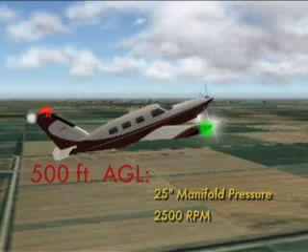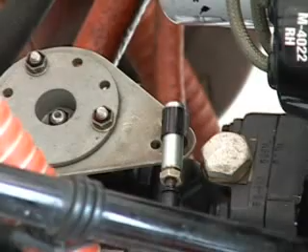The next component we're looking at is the propeller governor. Notice the propeller governor is located on the accessory case of the IO360 C1C6. I can't stress enough that it's not located in the dome of the propeller. As the propeller is actuated, we'll see the device on the upper portion of our governor moving, actuating the speeder spring and pulling the flyweights either inward or outward to bring the propeller towards an on-speed condition.

The governor has a pump which accelerates oil pressure to 275 psi. This oil line will feed up towards the front of the engine and into the propeller dome to actuate the piston, which changes the pitch of the propeller.

Here we have a diagram of the Piper Arrow propeller governor. It's located on the accessory case on the rear of the IO360 C1C6. Similar to the engine-driven fuel pump, this governor is driven as the camshaft turns in this engine. The rotary motion will be translated through to a rotary motion on a pump. This pump will boost the engine oil pressure, typically 90 to 100 psi, up to 275 pounds per square inch. This increased oil pressure is necessary to cause the propeller to fight the aerodynamic forces acting upon it.

During flight, there are four forces which act upon a propeller. The first is the thrust bending force. As the throttle is brought forward, the propeller begins to rotate faster. The propeller, in essence, is a rotating wing which creates lift on the face of the propeller. The lift acts in a forward direction, thus bending the propeller blades forward. This force tends to move the propeller towards a lower pitch.

The aerodynamic twisting force causes the propeller to rotate about its center of lift, thus rotating it towards a low-pitch, high RPM setting. Centrifugal force also acts upon the propeller, moving it towards a low-pitch, high RPM setting as well. The final force acting on a propeller is torque bending force. Torque bending force is due to the Newtonian law stating that for every action there is an equal and opposite reaction. As the propeller turns, it is forced in the opposite direction.

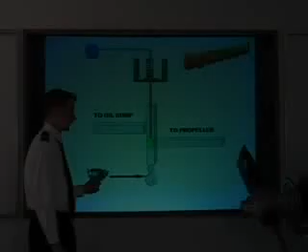So as we start our engine, oil will begin to flow through the governor pump up to the base of the pilot valve. Typically as we take off, we get to 500 feet in our Arrow and pull back to 25 squared. As you take your hand on the propeller control and pull back, what you're actually doing is pulling the speeder spring outwards, which is attached to this pilot valve, which causes your flyweights to fly outwards. Now what happens is the pilot valve moves forward, oil pressure will be allowed to flow up to the hub of the propeller.

This oil pressure up in the hub of the propeller causes the propeller to move towards a high-pitched, low RPM setting. Now, as oil is directed upwards, we'll move back towards an on-speed condition. This causes the flyweights to move back inwards towards their neutral position, the speeder spring back towards a neutral position, and the pilot valve attached to this entire assembly will center itself, stopping any oil flow to or from the hub of the propeller.

So let's say now as we get airborne, we move our aircraft violently nose upward and we go towards a prop underspeed condition. The propeller system of the Arrow will maintain on-speed 2,500 RPM. The way that it does this is through the use of the flyweights. Notice, as we pitch back, the flyweights move inwards.

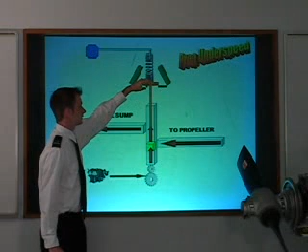The pilot valve assembly attached to the speeder spring will move downwards as the speeder spring is stretched. Oil is allowed to flow from the hub of the propeller up and back into the oil sump of the engine. So oil is drained from the hub, bringing it back towards the low-pitch, high RPM setting. The on-speed condition occurs as the flyweights move back outwards, the speeder spring will be compressed once again, and our pilot valve will move towards a neutral position and no oil will be flowing through the system, bringing the airplane back to the predetermined RPM that is set.